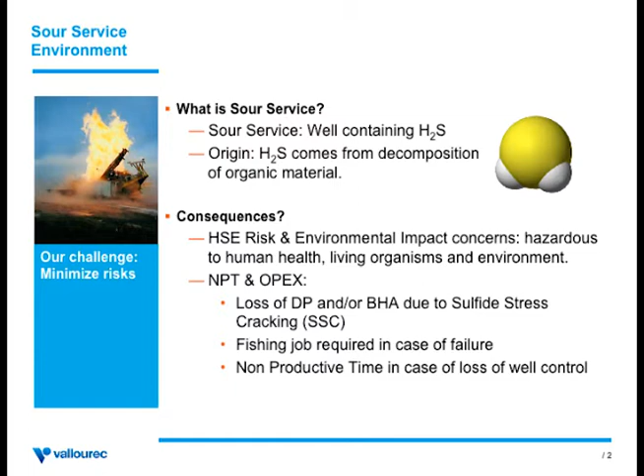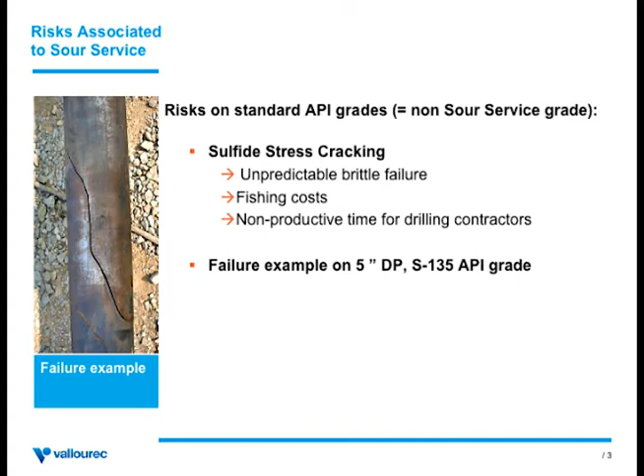So you can see in the picture on the slide an example of an SSC failure. It's a very typical facet of failure where you have a 45-degree angle compared to the stress direction. So in the case of a drill pipe, you will have a 45-degree angle compared to the vertical direction. The particularity of the failure linked to H2S is that it will occur below the tensile capacity of the pipe. So you cannot really predict it. You cannot see any deformation of the material. It's very different from any other kind of failure mechanism you can have on drill pipe. So it's unpredictable.

And it's very catastrophic because you would basically have the material behaving as a brittle material, such as glass if you throw a stone on a window. Without entering into too many details, this is how the mechanism can occur. You actually need to have the combination of unfavorable factors to have this kind of failure occurring.

First of all, you need to have acid conditions, the presence of water, and of course H2S in a significant amount, so you can have this corrosion mechanism starting. Of course, drill pipe are being used in a mud environment, so it's a controlled environment. There is no reason why you would have H2S, acid, low pH, because usually the mud has a pH above 7.

So the only condition that would be very unfavorable would be if you lose control of your well. If there is a kick, if there are fluids entering the annulus, if you drill underbalance, if you use MPD, then yes, there could be all those factors together, and then the mechanism will start. Typically, the H2S will decompose at the surface of the steel, and you will have a hydrogen embrittlement of the material.

So it's very common to see pipes coming out of the well after being exposed to H2S having a very dark green or black color. This is actually due to the first corrosion mechanism that occurs at the surface of the steel. Then the hydrogen will be present inside the steel matrix. And if you pull tension on the material, there could be a crack initiation that could propagate in a brittle manner, again typically with a 45-degree angle.

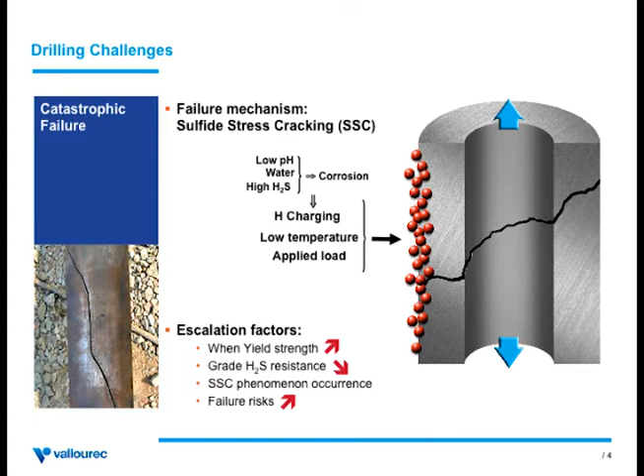So the way the industry qualifies sour service drill pipe to be used in a sour well, or in a well where they could be exposed to H2S, is with one of the NACE standard methods, the NACE TM0177, which was put together in 2005. That norm defines 4 testing methods. We only use one for drill pipe because it's a tensile test and it's relevant to the stresses applied to a drill pipe during drilling operations.

The test will last 720 hours, which is almost a month of testing a sample that you would take out of a drill pipe body or the tool joint or any other area on the pipe you would like to test. One month of testing under a specific content of H2S and a specific pressure. The test is actually not quantitative. It's not going to tell you that you can use this pipe for 5,000 rotating hours in a sour well. It's basically a go, no-go test.

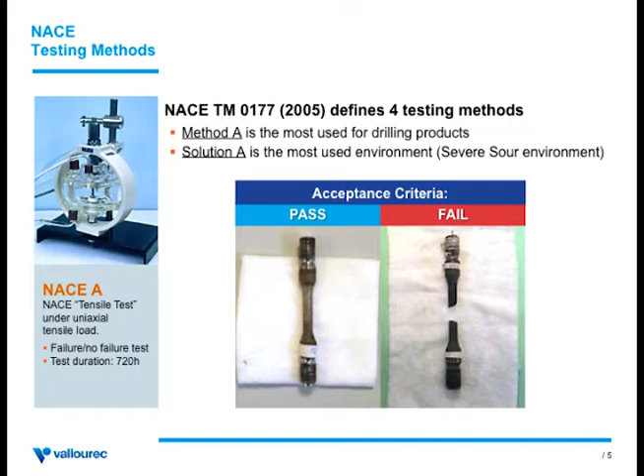If the sample passes the test, then we consider that the drill pipe is okay to be used. If the sample fails, then corrective actions would have to be taken. For example, another heat treatment, or eventually completely scrapping the batch and having to remanufacture the drill pipe itself.

This is an example. There are several pictures displayed on the PowerPoint which show the testing. You can see the sample is machined. It looks like a tensile test sample, and it would be placed into a loading cell, and then we apply a load that is always a percentage of the specified minimum yield strength of the steel. For example, if you have a grade with a 105 KSI minimum yield strength, we would apply a load of 70, 80, 85%, depending on the requirements.

Vallourec has several labs where we can do the testing in-house, either for research purposes or for actual orders. But there are a lot of certified labs around the world that can perform this kind of testing.

The NACE Material Recommendation 0175, or ISO 15156, is another standard that is widely used in the industry for sour service. It is not directly applicable to drill pipe because they are considered in that norm to be used in a controlled environment, which is the mud. It's basically a standard used for other tubulars. Nevertheless, the interesting part is that it helps to segment the susceptibility of steel tubulars to H2S depending on the partial pressure of H2S and the pH.

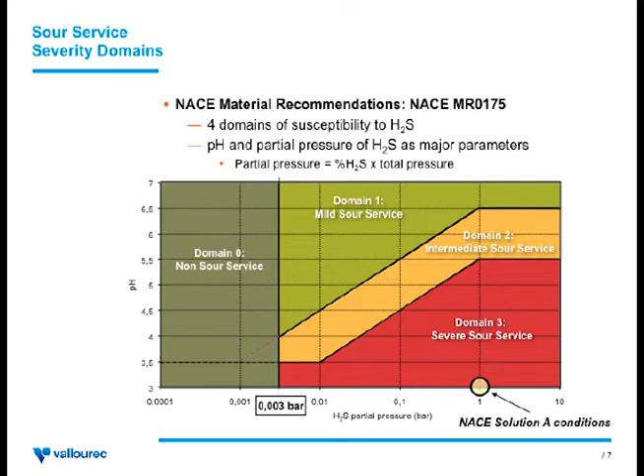The pH basically represents the acidity of the environment. The partial pressure would be the multiplication of the content by the pressure. That means that you can actually have the same severity on a tube if you use content that is pretty low but an HPHT well, or a high content of H2S in a well that would have a pretty standard pressure. So it's a way to be able to segment, project by project, what could be the risk towards tubulars.

Material selection for H2S resistant drill pipe is actually very challenging for the contractors and the operators. The main reason is there is no international standard that would provide guidelines and material requirements for such projects. So today the API 5DP and the ISO 11961 are the two international standards that govern the material requirements for drill pipe, non-sour.

But some initiatives at the regional level have been put together for a long time, for a decade. The most famous one, which started in 2004, is the IRP. The IRP stands for Industry Recommended Practices. There are 21 volumes, I believe, and volume 1 and volume 6 are dedicated to drilling in critical sour environments. Originally it's from Canada, and it's widely used in Canada, but it's also used in other regions of the world today. Vallourec produced the first IRP drill pipe in 2007 for the Sichuan Basin in China, for example.

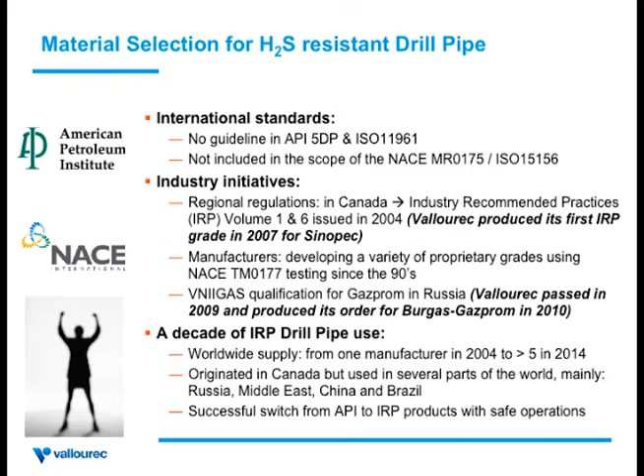There are also several other regional initiatives. Some of them are in China. But Russia is a good example. They have a certifying lab called VNIIGAS that would give you a proper test for qualification to use products in sour wells in Russia, or the ones operated by Gazprom. We passed this qualification in 2009, and we had our first commercial order in Russia using this standard in 2010. We are today in 2014, and those pipes have been used for a decade.

So IRP drill pipe has been used in several regions of the world, not only in North America, but also in the Middle East, very widely, partly in North Africa, Europe, Russia. It's been quite a successful use because, to our knowledge, absolutely no failure has been reported. But you will see that there are still some new challenges upcoming for which there is a need to have more stringent norms today.

One of the main reasons is, and it's not only true for sour environments, the industry is pushing every limit further, especially with the increased demand for domestic gas in some regions of the world. Projects are being drilled in harsher and harsher environments. Projects that were not economical before due to the very high content of H2S: it's not only an HSE concern and a drilling concern, you also have to deal with the downstream process, H2S or sulfur as a byproduct. So it's very difficult for operators to make those projects economical. But the trend is that wells with higher and higher content of H2S, contents we would not have believed possible to deal with 10 years ago, are being explored and even developed as we speak.

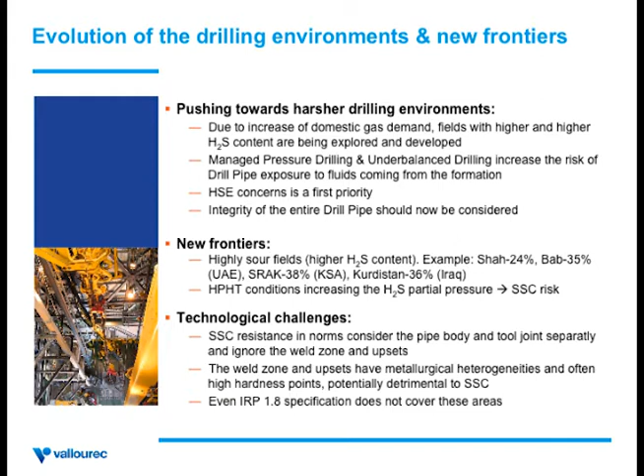It is very detrimental and more risky to use a high grade in those environments. So there is a lot of, I would say, development to be done from the manufacturer side to be able to meet those upcoming challenges. One last comment on this.

A drill pipe is a product which is a tube welded to a tool joint by a process called friction welding. And any industry standard, including the IRP, is considering both the tool joint and the pipe body separately for the NACE testing. And we do believe today that there is a need to also consider the weld and any other area that was not really tested before. You can't just consider separately bits and pieces. The integrity of the entire drill pipe has to be taken into account.

What is a sour service grade? Basically, it's the combination of a specific chemistry and a specific heat treatment process. So we have also a lot of additional controls to be done during the steelmaking operations. This is what we call the steel cleanliness: the level of inclusion, the size of the inclusion in the material matters. If the steel is very clean, there is a lower risk of having a crack initiation in that particular area around the inclusions.

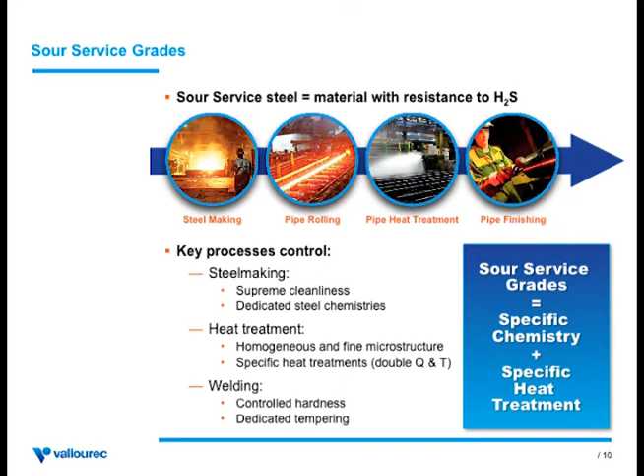So we have some specific steelmaking processes that are much longer, require more time, and are more complex than for other types of grades. There are also some chemistries, always proprietary, that are being used. And heat treatments, of course, the quenching and tempering process for the tool joint, the weld, and the pipe body is very important and will not be the same as any standard drill pipe. In some cases, there could actually be several quenching and tempering processes made on some part of the product to basically reach the performance we are looking for and eventually pass the NACE test.

As a conclusion, Vallourec has actually been supplying sour service grades for decades, and we have integrated mills, so we can deal with everything from the steelmaking to the finishing of the pipe and work on these different steps to provide reliable products. We have in-house R&D and NACE testing facilities. There are today several manufacturers on the market that can provide IRP grades, and this for several years. So there is, I would say, in general, a huge improvement in the quality of the products in order to meet the market requirements, globally speaking.

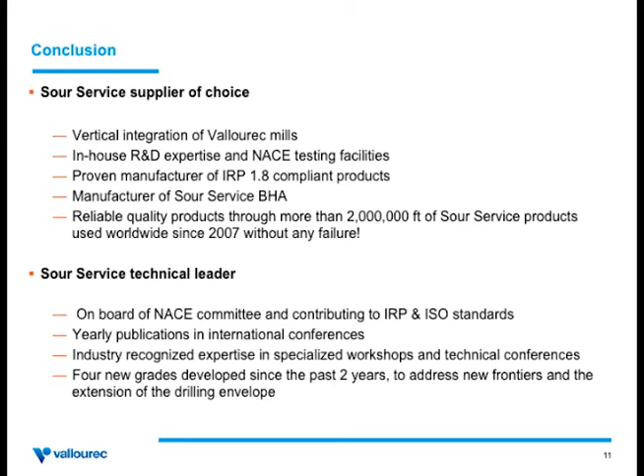And also, it is very important to remain very active from a normative standpoint. So we are, of course, on board of the NACE committee, try to be on top of all the SPE, IADC boards and conferences that would deal with it, and more recently, on board of some ISO organization to revise some of the existing norms and provide a little bit more guidelines to all the users of sour service drill pipe in the industry.

Thank you very much for an informative presentation, Vincent. And I've got to say, anything that increases demand and interest in natural gas is a good thing in our book. So that's great. But let me ask you, if I may, without compromising any proprietary information, can you give us some guidance or elaborate more on anti-H2S chemistry and pipe manufacturing, Vincent?

Basically, we have to remember that a sour service drill pipe, or drill pipe in general, has to be cost effective. So we are not dealing here with CRA material or stainless steel or very highly alloyed materials, which could be the case for casing and tubing, mostly the tubing. Nevertheless, basically the strategy is to microalloy the steel. So there are some elements that we would use. An example would be titanium, niobium, molybdenum.

Those elements will help to build a refined microstructure and to have basically a better resistance to crack propagation and crack initiation. And this is, I would say, in general what any manufacturer would do, but of course it's our own recipe on what component and what percentage, or ppm in some cases, and how to heat treat it in a way that it's actually providing a good microstructure.

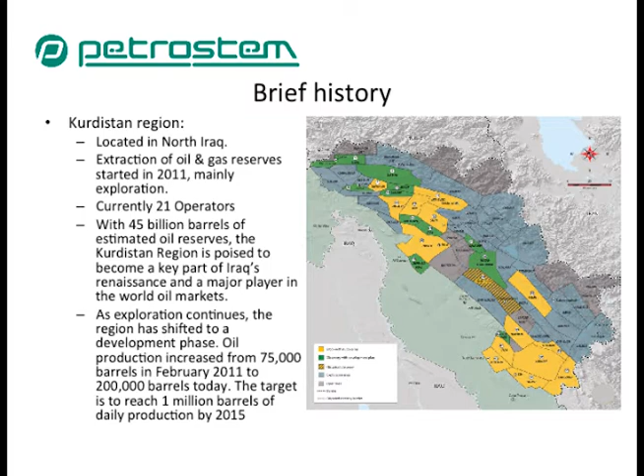As exploration continues, the region is shifting to a development phase. Oil production increased from 75,000 barrels in February 2011 to 200,000 barrels today. The target is to reach 1 million barrels daily production by 2015. There are many challenges we face operating in Kurdistan. Politically aside, it's one of the most critical sour regions in the world, with high concentrations of H2S up to 30% and above.

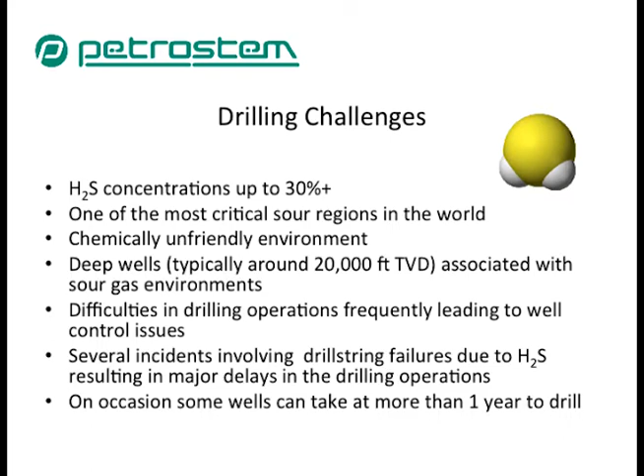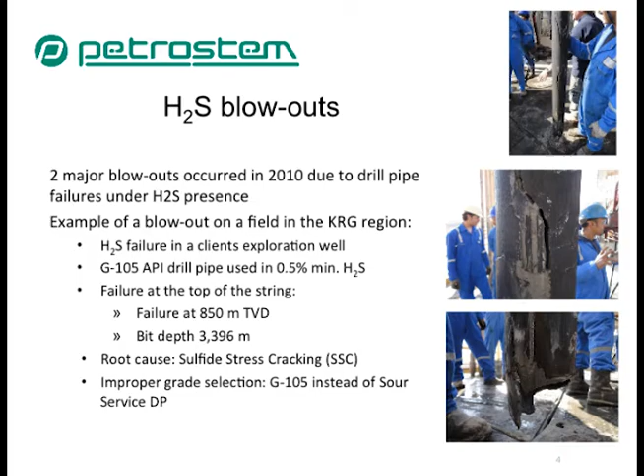There have been several incidents over the period of time with drill string failures due to H2S, and on occasion the wells can take more than a year to drill. Two major blowouts occurred in 2010 due to drill pipe failures under the presence of H2S. The H2S failure in the client's exploration well was using G105 drill pipe. The failure ended up at the top of the string, and the root cause was defined as sulfide stress cracking. You can clearly see what happens when the improper grade is selected on the drill pipe.

Thanks to a benchmark with other highly sour regions of the world, a selection of drill pipe grades and double shoulder connections orientated towards IRP Volume 1 products. In-house NACE testing is performed in all the drill pipe, and Petrostem have progressively ramped up its inventory of drill pipe and accessories to meet the specification and also the challenges faced by our clients. There have been several workshops organised by both Petrostem and Vallourec within the region, and operators, drilling contractors and the KRG's Ministry of Natural Resources have been in attendance.

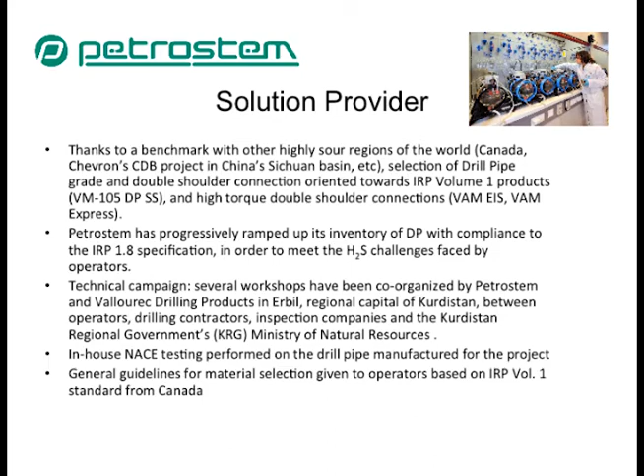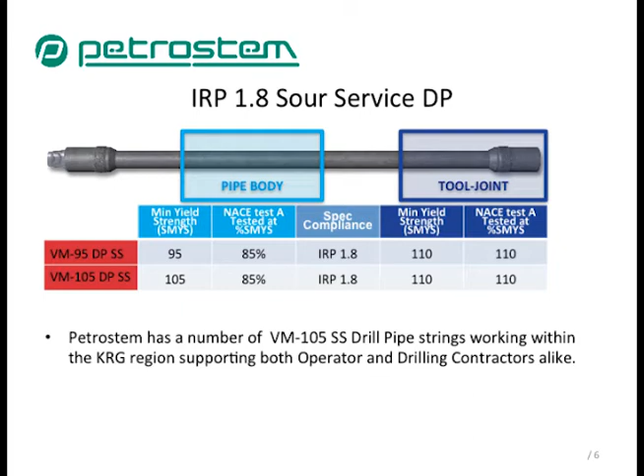Here we've got an IRP sour service drill pipe. Petrostem has a number of sour service drill pipe strings and accessories working within the KRG region to support both operator and drilling contractors alike. Here we can see the basic composition of tool joint and tube sections on our sour service drill pipe, manufactured in accordance with IRP 1.8.

Back in 2011, a client of ours was the first operator to use the VM105SS drill pipe in Kurdistan. Over 5,000 metres of pipe was used in the H2S well, and no SSC failures were reported throughout the year's drilling campaign. Currently, the large majority of rigs drilling exploration wells in Kurdistan have been equipped with sour service drill pipe, and this has ensured safe operations for more than 3 years.

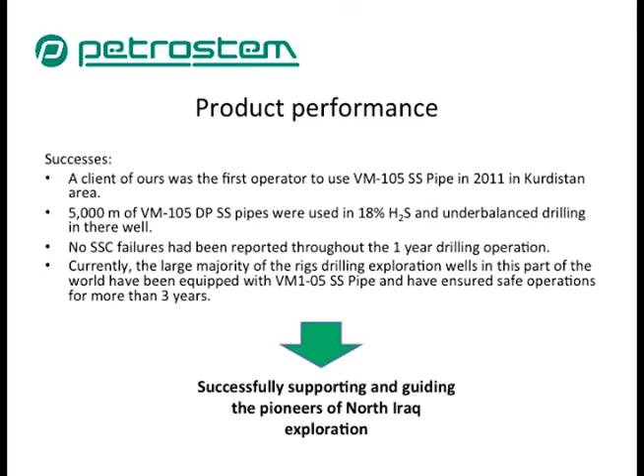The remaining challenges we have are non-H2S related corrosion: acid injection when stuck pipe, and CO2 corrosion. Acid injection must basically be avoided when using any steel drill pipe.

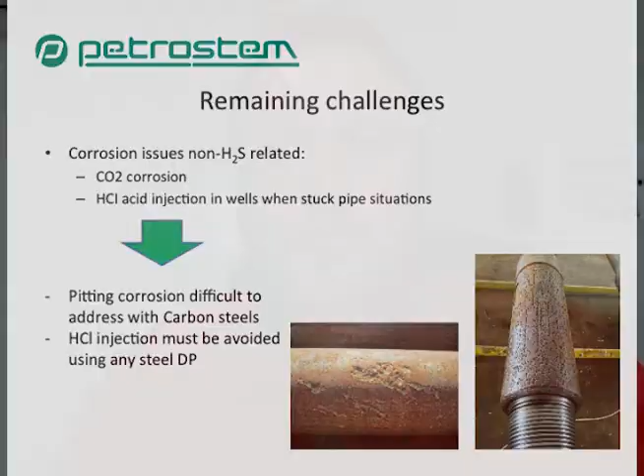Thanks, Ian. Ian, what growth trends do you see in H2S wells in Kurdistan? For sure there will be growth in the sour wells in Kurdistan, as with the majority of carbonate wells in the Middle East where there's a high prevalence of H2S. Historically, these fields were uneconomic, but with the advent of modern technology and a higher price of oil, they are now being exploited, so proportionally, they are on the increase.

By 2019, the Kurdistan region is aiming to produce 2 million barrels daily and envision the presence of a fully functioning oil and gas industry exporting to the world markets. Vincent, can you elaborate on that from a global perspective? Yeah, I think Kurdistan is a good example of a region that is basically developing around H2S projects, but it's clearly something we are seeing in different parts of the world. The main reason is the demand for domestic gas.

So the Middle East has been pretty active in developing several wells, including with complex well profiles. There were a lot of technological challenges here. North America is also continuing to develop their sour projects. Historically, they've been pioneers in that respect. And we are seeing also in Asia several basins for which highly sour gas reservoirs are being developed. It's definitely a growing trend.